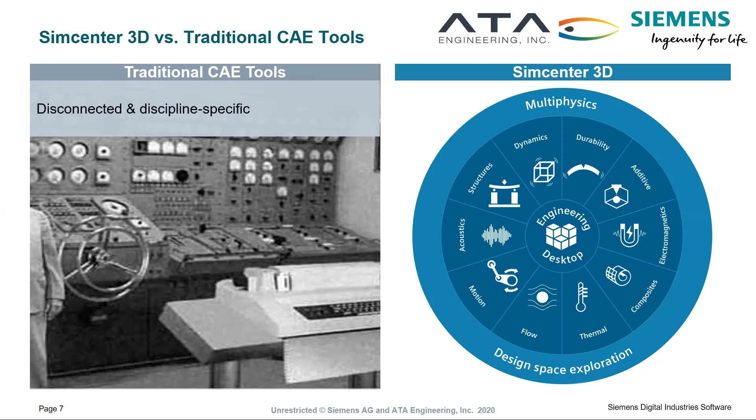So how does this compare to more traditional CAE tools? Let's take a look. More traditional CAE tools are disconnected and discipline specific. Your flow simulation has no relation to your thermal simulation, which has no relation to your composite simulation or your durability. In Simcenter 3D, instead, we have a scalable, unified, and multidiscipline simulation environment through which you can access all of these capabilities, most of which are supported by Simcenter 3D tokens.

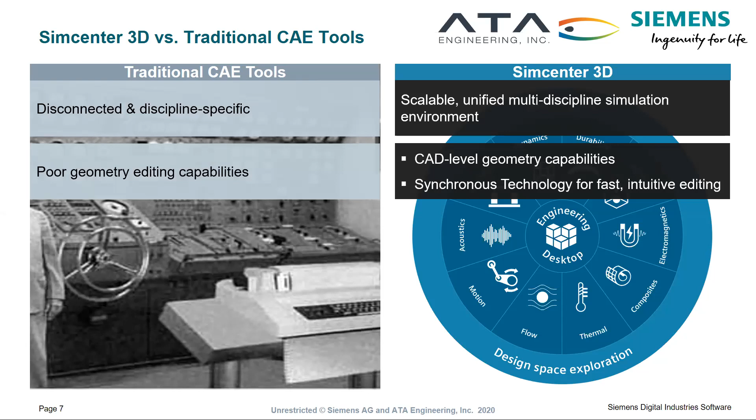Traditional CAE tools typically have very poor geometry editing capabilities. On the other hand, Simcenter 3D is based on Siemens NX, one of the most powerful CAD tools available, and it has extremely powerful CAD level geometry capabilities and Siemens' own synchronous technology for fast and intuitive editing, no matter what the source of the original CAD data.

Traditional tools require you to repeat most of the modeling pipeline for each design iteration, whereas Simcenter 3D is associative to the CAD model, and when you make changes to your design, can automatically update the analysis model as your design changes, so that future design iterations will be able to be conducted much more quickly than the original one.

Traditional CAE tools are usually tied to a single solver, whereas Simcenter 3D is an open platform with multi-vendor CAE software support. Whether you obtain your solvers from Siemens or whether you license them from ANSYS, from Dassault Systèmes, or MSC Software, Simcenter 3D will be able to support them.

Traditional CAE tools have no data management included. Simcenter 3D, on the other hand, seamlessly integrates with Teamcenter simulation to track and manage your entire simulation process.

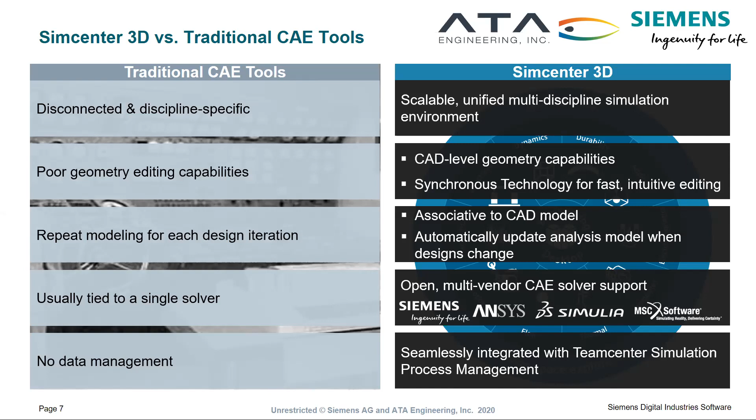So here is what you end up with at the end of the day with Simcenter 3D doing these types of tasks: multi-CAD, geometry importing and editing, comprehensive meshing, assembly management, with something that NX and Simcenter 3D are particularly known for, solution and subcase management, post-processing and reporting, all while maintaining CAD associativity.

So it doesn't matter whether you obtain your solvers from Siemens through the Simcenter Nastran or Simcenter Samcef solvers, or whether you already own licenses of Abaqus or ANSYS, LS-DYNA, or MSC Nastran.

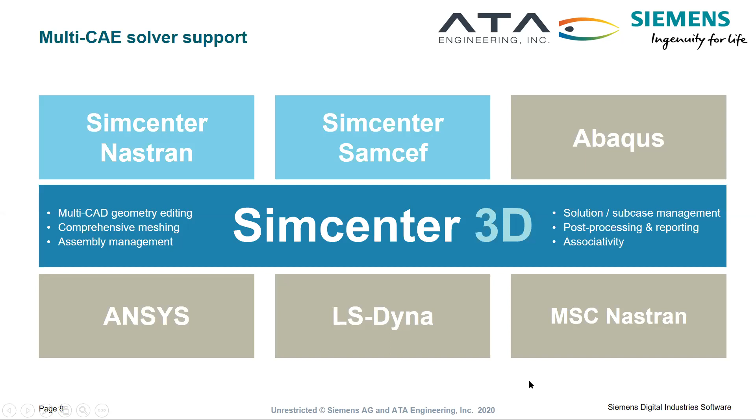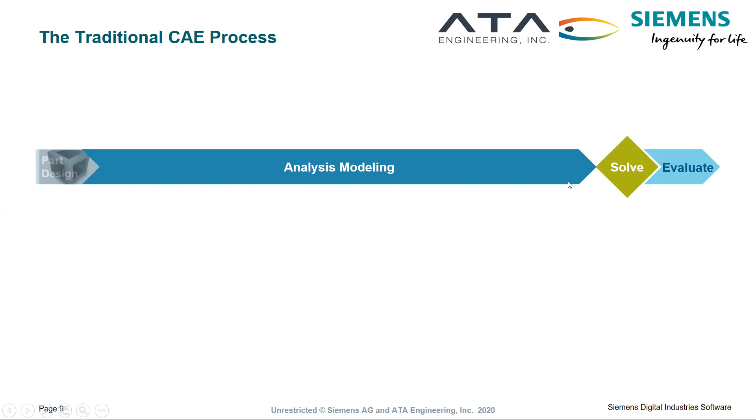So here's what the traditional CAE process looks like. You start with your part design. You have this long analysis and modeling process, which is made up of different steps. Find and import your data, repair and edit geometry, create your meshes, apply your loads and boundary conditions, calculate and do your post-processing and visualization.

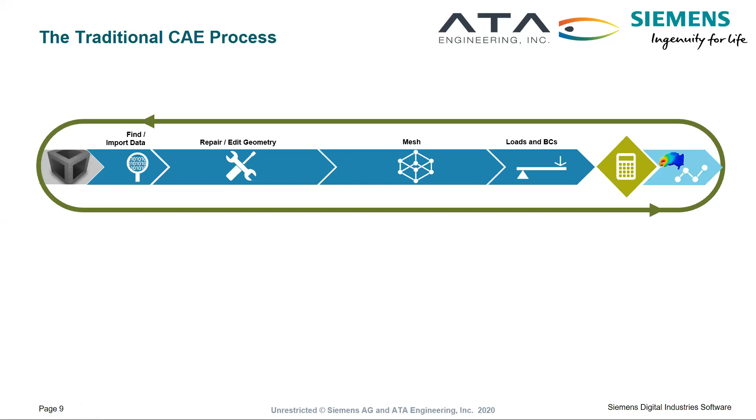Using Simcenter 3D, we have that same process, but it is much more accelerated. So on your first design iteration, you will find that you spend less time importing data, repairing geometry, creating mesh and applying loads because of the fully integrated nature of the system, and also the very powerful CAD capabilities of NX.

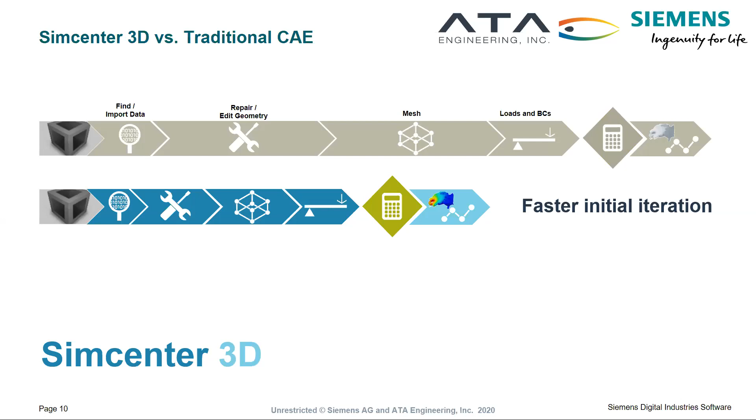Where Simcenter 3D really comes into its own is when you're doing design iterations, and now you want to go into your CAD model, make a change, and redo your entire simulation workflow. This is where Simcenter 3D can greatly accelerate the process. So you can do a rapid update for future iterations within the same project.

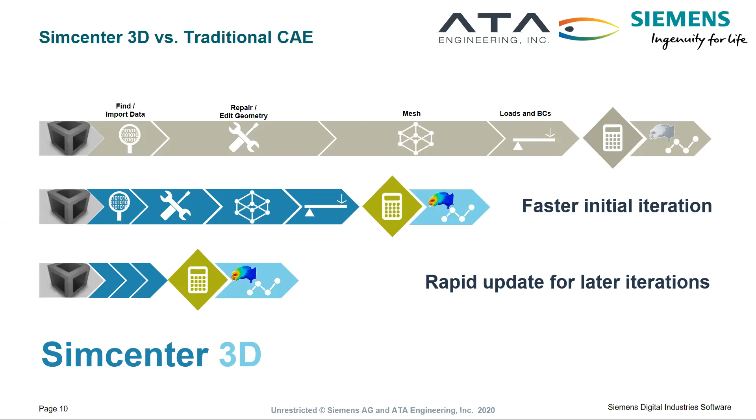So what is the motivation for value-based licensing? As I was explaining as we walked around this wheel a minute ago, Simcenter 3D offers a very wide range of capabilities, but if a customer needs access to all these capabilities, it could be a very expensive process to license each one using traditional modeling. That is, to buy a module-based license outright, or an annual subscription, or even a rental, could be fairly expensive if you need access to a lot of capabilities.

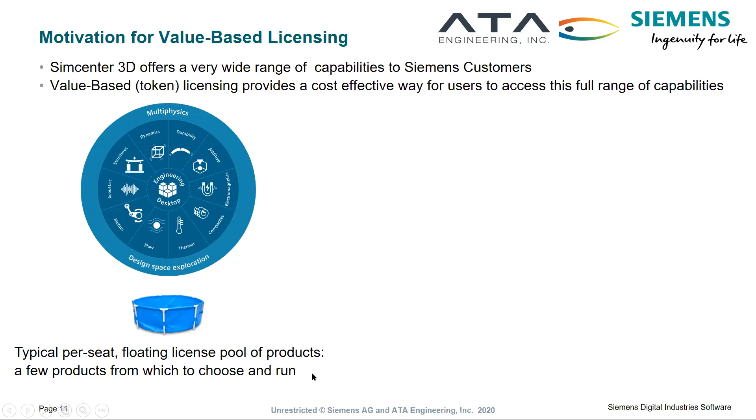So what you end up using traditional licensing is this type of license pool. You have a typical per seat floating license pool of products. You have a few products from which you can choose and run. With the Simcenter 3D tokens, the token pool looks a little bit more like this. You have access now to 84 different products, and that number, in fact, is growing as we add more products to the token pool. But we have access to a great deal more products through the Simcenter 3D tokens.

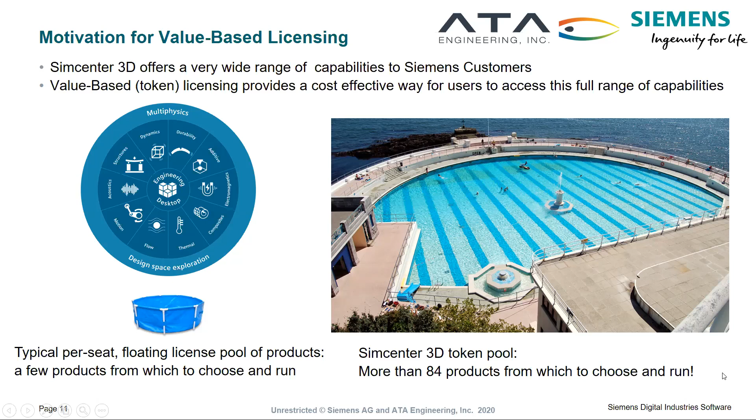So what is value-based licensing? Value-based licensing is an additional licensing method accessed through token packs, which I'll talk about in a moment. It uses the exact same Flex license server that's used for module-based licenses, and users can have a mix of token licenses and module-based licenses.

Now, to use tokens, tokens require a base application. The base licenses can be either perpetual or a subscription or a lease, and they can be any one of the following: Simcenter Engineering Desktop, the desktop add-on, which adds the engineering desktop to an existing NX Mach 1 license, Simcenter Structures, which is the Simcenter Engineering Desktop with Nastran Basic, so you do not consume tokens to access Nastran, and the Simcenter Structures add-on, which is the same thing, only added on to an existing NX Mach 1 license.

The important thing about Simcenter Structures is that it is probably one of the most cost-effective ways to buy Nastran, because you're getting the full capabilities of Nastran Basic for only a slight adder on top of the engineering desktop. And we'll see how that works out in one of our examples below.

So why offer value-based licensing? Value-based licensing is intended to provide flexibility to customers, allowing access to all the applications supported without having to buy those specific products. Importantly, it accommodates changes to the customer's capability over time, not just changes with today's existing projects, but if your projects are different 3, 6, 9, or 12 months from now, the tokens will allow you to change your product mix to support your ongoing projects.

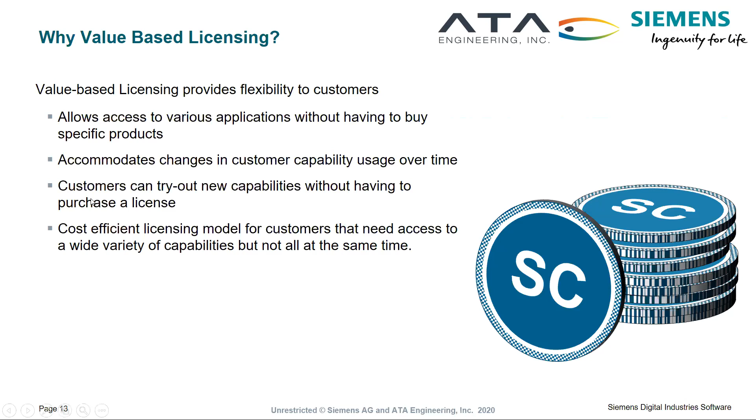Customers also use tokens to try out new capabilities. It's okay to get a 1-month trial of a license to see if maybe it will work for your particular project. Even better to be able to access those same capabilities anytime you like with tokens and try out the product for a longer period of time. It is a very cost-efficient licensing model for customers that need to access a wide variety of applications, just not necessarily all at the same time.

So how does value-based licensing work? Users always need to run a base application that uses module-based licensing. The additional Simcenter 3D applications can be run using module-based licensing if you have a license for those applications, or the token licensing. When a user attempts to check out a particular application, Simcenter 3D will first look to see if there is a module-based license available. If it is, then that module-based license will be checked out.

If there is no module-based license available, either because it's in use or because you never had one in the first place, then tokens will be used to access that module. If there are insufficient tokens to support that application, then a license fault will be shown to the user.

So when tokens are used, each application consumes a defined number of tokens, and it isn't a great mystery of life that the tokens—the whole reason why it's called value-based licensing—are based on the value of the individual applications. So an application that would cost you $40,000 per year to subscribe would use more tokens than an application that would cost you $20,000 per year.

When your application ends, the tokens can be checked back in and be made available to other users. The number of applications and the types of applications that can be checked out on top of the base application, either Simcenter 3D Structures or Simcenter 3D Engineering Desktop, is limited only by the number of tokens that you have in your pool.

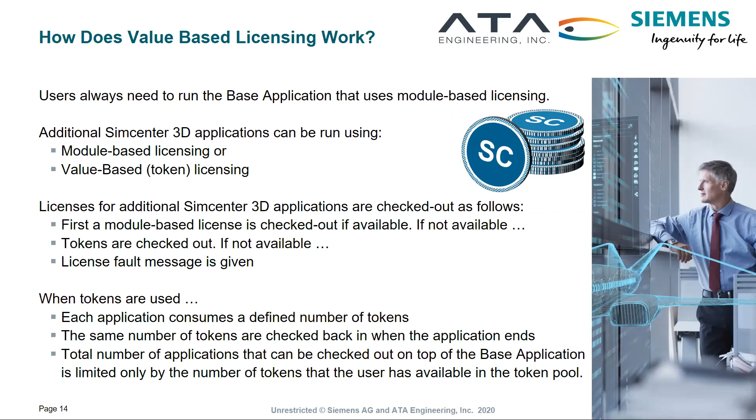So how do you buy tokens? Value-based licenses are sold in packs. The first pack is a minimum of 100 tokens, so you cannot buy just 50 tokens, and in most cases you wouldn't really want to. 100 tokens is a practical minimum for most of the product mixes that people would be wanting.

So you would purchase SC10100, the Simcenter Value-Based License 100 pack. After you have purchased that, you can purchase tokens in bundles of 100 or 50, whatever suits your needs. These products—and this is different from NX tokens, which we talked about in a different webinar earlier this week—these token packs are available on a perpetual basis, a subscription, or a rental. At this point in time, NX tokens may only be accessed through a subscription, but Simcenter 3D tokens may be purchased outright.

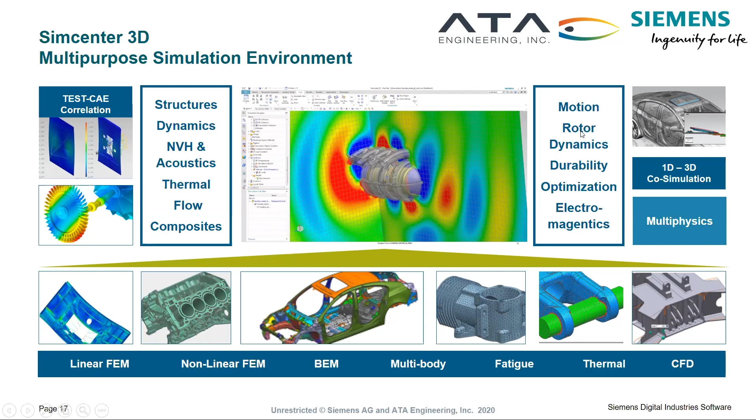Where we start is with the engineering desktop. The engineering desktop is the base application. Again, Simcenter 3D Structures is engineering desktop plus Nastran Basic. So everything starts with engineering desktop. The engineering desktop has the ability to clean and parameterize CAD geometry from almost any source. And we do offer these environments not only for Siemens products, but for a number of other popular commercial solvers.

I should note that we are providing here an environment, or a link if you will, to these solvers. If you're accessing Siemens solvers, you may be doing it through tokens, or you may have access to Nastran Basic through Simcenter 3D Structures.

But if you're accessing the nonlinear solvers from Samtech, which has since been acquired by LMS, a Siemens company, then you may be using tokens for those. But no amount of tokens will give you access to an ANSYS, an LS-Dyna, an MSC Software, or a Simulia Abaqus license unless you've already purchased one from those companies. We only provide the link to these other solvers. We do not license those to you.

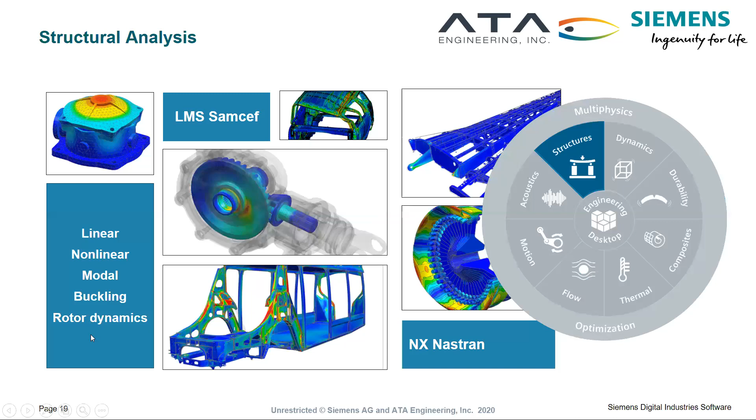So on the structural analysis side, we can do linear, nonlinear, modal, buckling, or rotor dynamics analysis using the LMS SAMCEF solvers or NX Nastran.

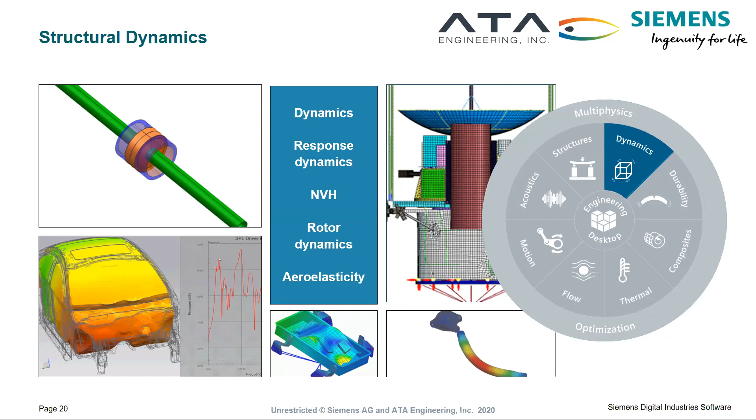On the composites analysis, the software is able to model the strength or stiffness of your composite structures, buckling and post-buckling analysis in linear and nonlinear fashions, including progressive damage simulation and manufacturing or layup simulation of the composites.

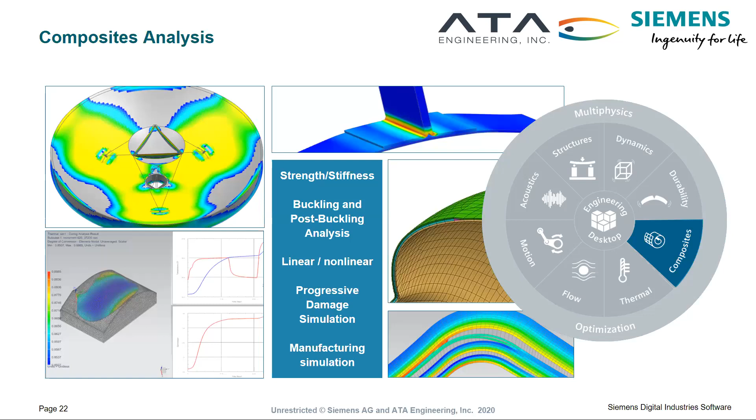The thermal analysis module can model heat conduction, convection, conjugate heat transfer through its coupling with Simcenter Flow, and radiation heat transfer. Note that we also offer specialty modules for space systems cooling and for electronic systems cooling, which are also available through the Simcenter 3D tokens.

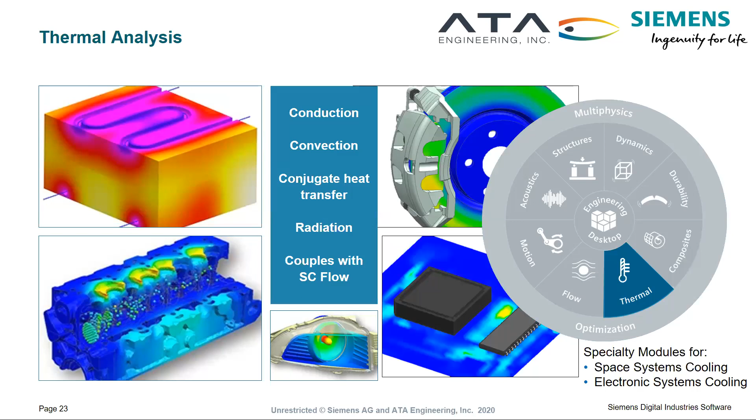The fluid dynamics analysis, otherwise known as Simcenter Flow, can model compressible and incompressible flows, Newtonian and non-Newtonian fluids, with mixing planes, multiple rotating frames of reference, two-phase flows, mixtures, and particles. And as I mentioned before, we'll couple with Simcenter Thermal for performing conjugate heat transfer calculations.

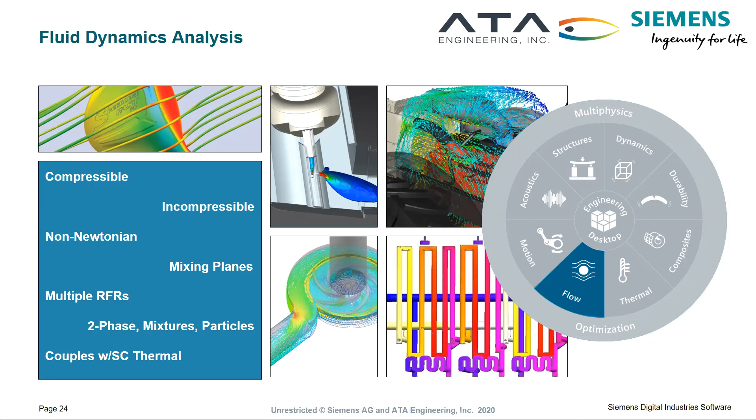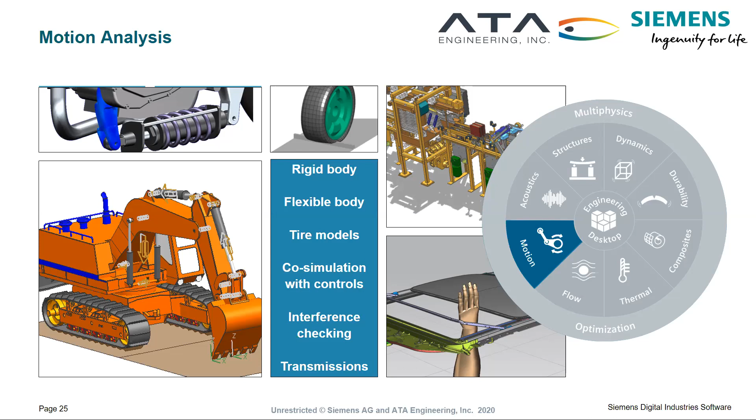The motion analysis capabilities come through Simcenter Motion, which allows you to model rigid body motion, flexible bodies, and includes tire models, co-simulation with controls, interference checking, and even specialty applications such as gearboxes and transmissions.

The acoustics analysis capabilities available through the token system include noise radiation, transmission loss, enclosures, acoustic scattering, and other acoustics modeling.

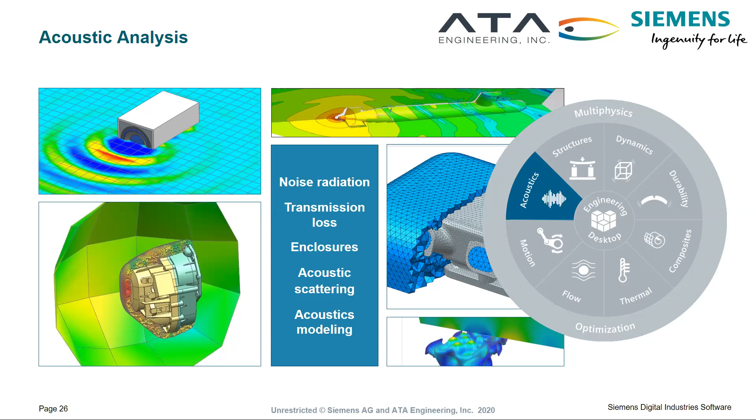Multiphysics is one of the most important capabilities of Simcenter 3D. To do these types of multiphysics calculations using traditional methods typically involves a somewhat tedious process of connecting the co-simulation between two different tools which may or may not talk to each other, even if they are provided to you by the same vendor. In Simcenter 3D, we're able to support these multiphysics analyses no matter what the type, right through the single user interface.

These may be thermal mechanical simulations, thermal fluid simulations, fluid structure interaction, vibroacoustic analysis, aero-vibroacoustic analysis, or structural and motion analysis.

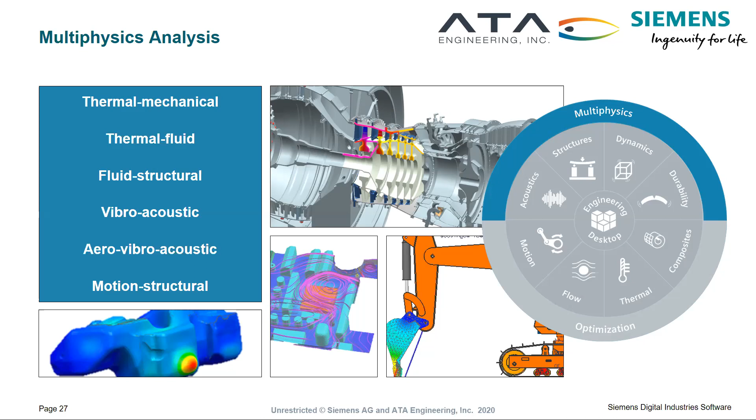Design space exploration, the bottom part of this outer ring, also affects all of the types of simulation supported by Simcenter 3D. This is a subset of the HEEDS software, which is also sold by Siemens as a standalone product and can talk to any piece of software from any company.

The optimization capabilities within Simcenter 3D are provided through the design space exploration feature, which is enabled through the token system. And it will allow you to do design space exploration, topology optimization, geometry optimization, and finite element parameter optimization through Simcenter 3D, supported by the token system.

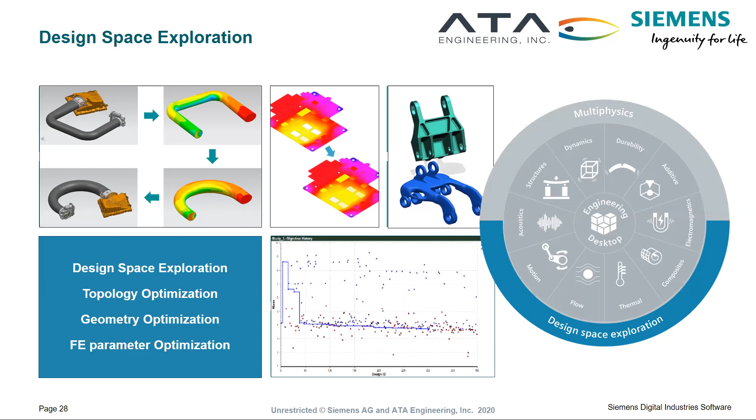Additive manufacturing is also a very important field of study right now. Everyone is looking to manufacture their products using additive manufacturing methods and would like to know what the properties of the parts are going to be when they're finished, if there's going to be distortion in the manufacturing process, which could be corrected for in advance. And that's what the additive manufacturing capabilities of Simcenter 3D provide. It can simulate the 3D printing process, predict thermal distortion, and allow you to compensate in advance so that you print right the first time.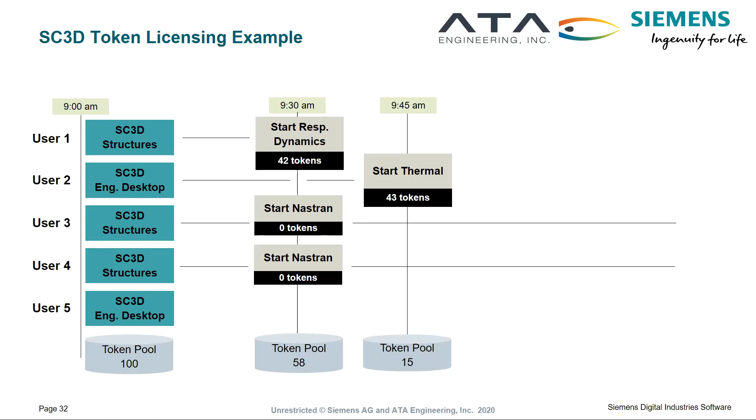And get to work. At the beginning of the day, user 1 starts up the response dynamics module, which uses 42 tokens. Users 3 and 4 both have Simcenter 3D Structures, so they have access to Nastran Basic without using any tokens, and they continue through the day without using any tokens at all. At 9:45, user 2 starts up Simcenter Thermal, which uses 43 tokens, and together with the 42 tokens being used by user 1, knocks the token pool down to 15.

Later in the morning, user 1 finishes with the response dynamics work, and the token pool jumps up to 57 because those 42 tokens are released. Later, user 2 finishes their work with Thermal and releases those tokens, which is a good thing because user 5 now wants to start up Simcenter Flow, which requires 75 tokens. Those tokens are now available and he is able to begin his work.

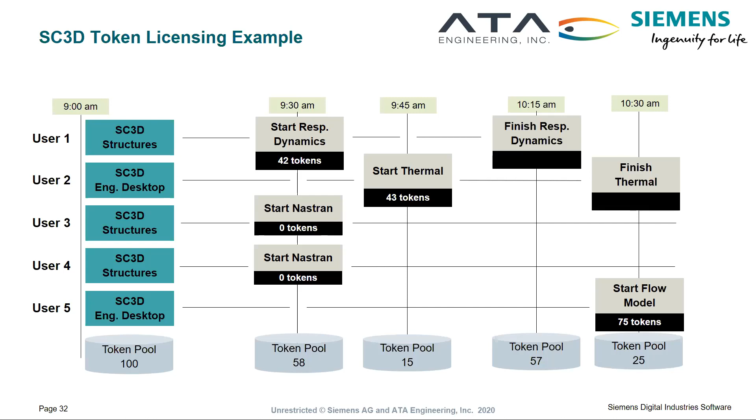Let's look at two other examples of companies, one that is going to get good use out of Simcenter 3D tokens, and another where maybe it isn't the right solution. Let's take a look at this customer: an aerospace customer with 12 licenses of Simcenter Engineering Desktop or Simcenter Structures, with on and off varying needs for SC Thermal, Flow, Space System Thermal, ESC, response simulation, etc. Which is going to be more effective, individual licenses or tokens?

So here we look at Monday, Tuesday, Wednesday, Thursday, and Friday, and the number of licenses used for each application. I'll point out that specialty applications like electronic systems cooling or space systems thermal were only used once during the entire week. Without a token system, you would have to buy a license for those particular modules, and because they are very specialized and advanced, it's not a cheap license. Yet with the token system, they may be accessed for a lower price.

So let's take a look. When we add up all the licenses needed through the week, we end up with 32 licenses, which could be accessed with 500 tokens. So 9 applications were used. If we were using module-based licenses, 32 separate licenses would be required, whereas value-based licensing required 500 tokens. When we look at the cost between module versus value-based licensing, the user saves almost 60% by going with the tokens.

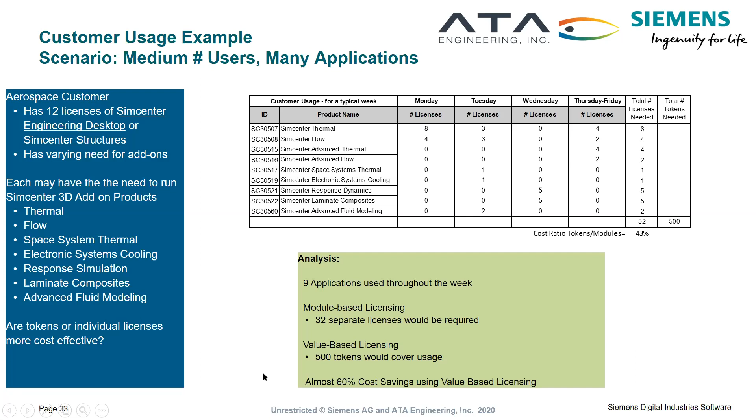Now let's take a look at the counterexample. In this case, we have a user that has 12 licenses of Simcenter Engineering Desktop and needs occasional use for Nastran Dynamic Response, but no other modules. So most all of their users are using their licenses of Nastran Basic, and a smaller number are using Dynamic Response throughout the week. When we add up the tokens versus the licenses, it shows that in this case, the module-based licensing is 60% cheaper than the value-based licensing.

So it's typically going to be the case that if you want access to a lot of different capabilities for your team, value-based licensing may be useful. If you're looking to use only a few modules of Simcenter 3D and use them all the time, traditional licensing is probably going to be more cost-effective.

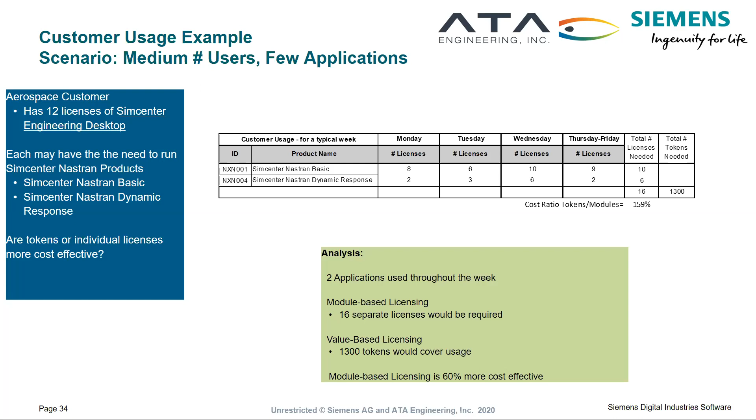So how do you estimate the number of tokens you might need? First, estimate your peak usage requirements, the number of products that may be in use at any one time. Provide this information to us at ATA Engineering, and we'll work up an analysis like I showed you in the previous slides to tell you whether token-based licensing is a good fit for your company. Don't forget to consider what your future requirements may be - potential changes to the types of modules and numbers of modules you might require.

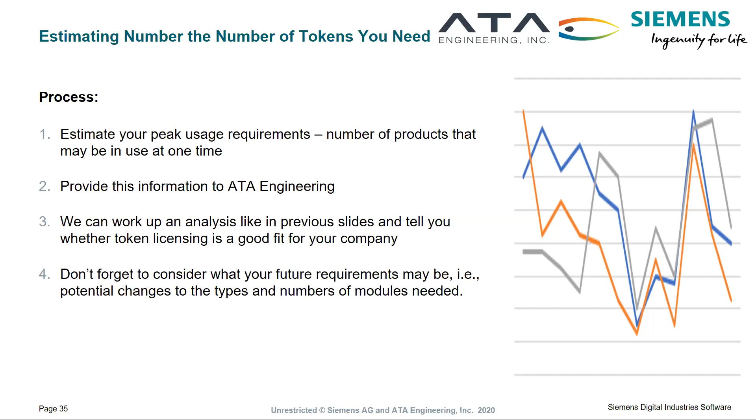Now let's go into a few frequently asked questions on value-based licensing. The first is, which Simcenter 3D versions use value-based licensing? VBL has been supported since Simcenter 11, and all subsequent versions support value-based licensing.

Can Simcenter 3D tokens combine with tokens in other portfolio products, such as NX tokens, Amesim tokens, or STAR-CCM+ Power tokens? The answer is no. Simcenter 3D tokens can only be used in Simcenter 3D. It can be used to access Nastran or Samcef applications, but not NX, Amesim, or Star applications.

Can tokens be used with license borrowing? No, they cannot. So you cannot borrow your licenses and put them on your laptop if they are tokens. That is functionality reserved for module-based licenses.

When are tokens more cost-efficient than module-based licensing? The important thing to remember here, if you only remember one thing about the value of these tokens, is that there is no hard and fast rule. Each customer situation needs to be evaluated. In general, though, customers who need to access a larger range of products will be good candidates for value-based licensing.

Can users control whether a module-based license or a token-based license is consumed? No, they cannot. Simcenter 3D will always try to check out the module-based license first, and only if that module is not available will it try to check out the appropriate number of tokens.